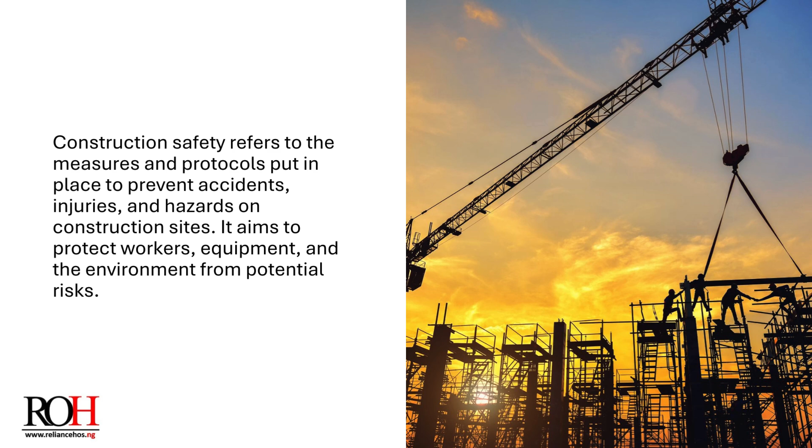Definition of construction safety: construction safety refers to the measures and protocols put in place to prevent accidents, injuries, and hazards on construction sites. It aims to protect workers, equipment, and the environment from potential risks.

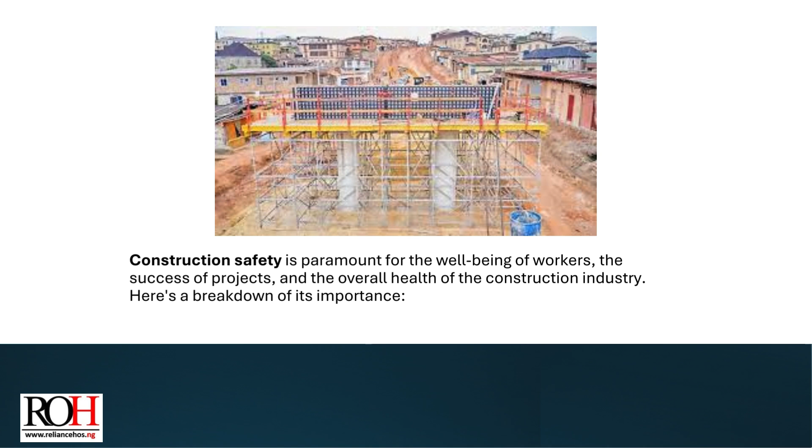Introduction to construction safety. Construction safety is paramount for the well-being of workers, the success of projects, and the overall health of the construction industry. Here's a breakdown of its importance.

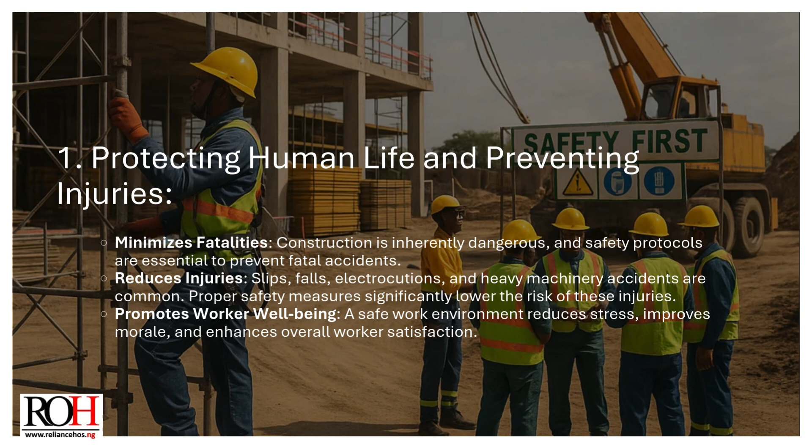1. Protecting human life and preventing injuries. Minimizes fatalities: construction is inherently dangerous, and safety protocols are essential to prevent fatal accidents. Reduces injuries: slips, falls, electrocutions, and heavy machinery accidents are common, and proper safety measures significantly lower the risk of these injuries. Promotes worker well-being: a safe work environment reduces stress, improves morale, and enhances overall worker satisfaction.

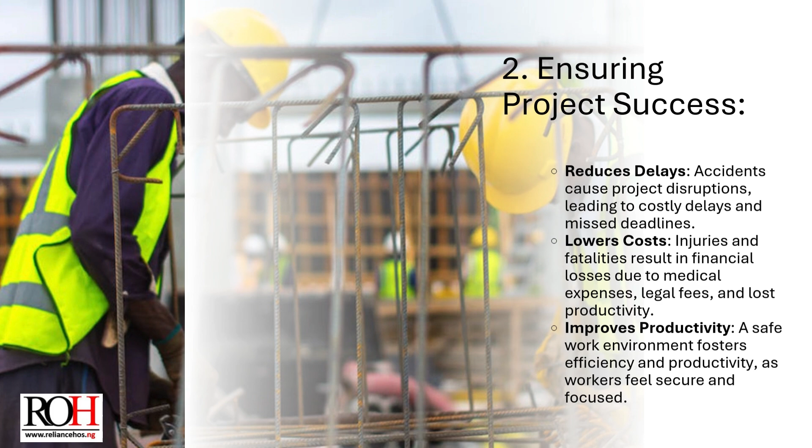2. Ensuring project success. Reduces delays: accidents cause project disruptions, leading to costly delays and missed deadlines. Lowers costs: injuries and fatalities result in financial losses due to medical expenses, legal fees, and lost productivity. Improves productivity: a safe work environment fosters efficiency and productivity as workers feel secure and focused.

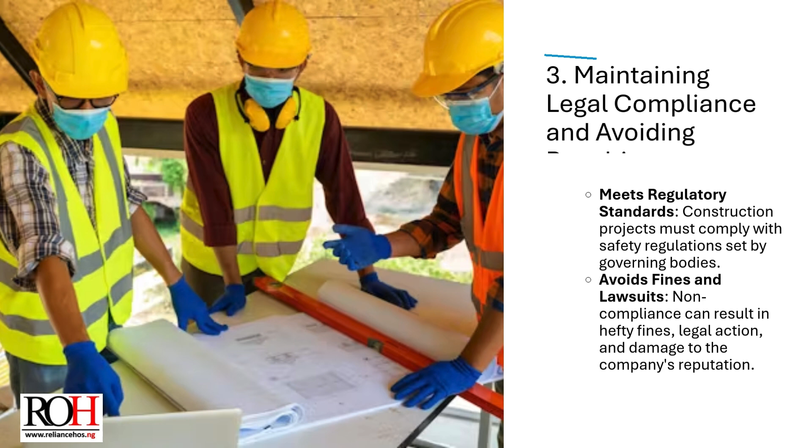3. Maintaining legal compliance and avoiding penalties. Meets regulatory standards: construction projects must comply with safety regulations set by governing bodies. Avoids fines and lawsuits: non-compliance can result in hefty fines, legal action, and damage to the company's reputation.

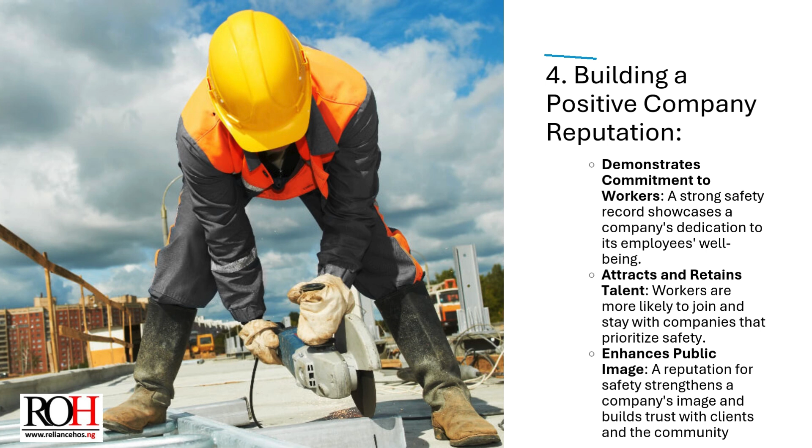4. Building a positive company reputation. Demonstrates commitment to workers: a strong safety record showcases a company's dedication to its employees' well-being. Attracts and retains talent: workers are more likely to join and stay with companies that prioritize safety. Enhances public image: a reputation for safety strengthens a company's image and builds trust with clients and the community.

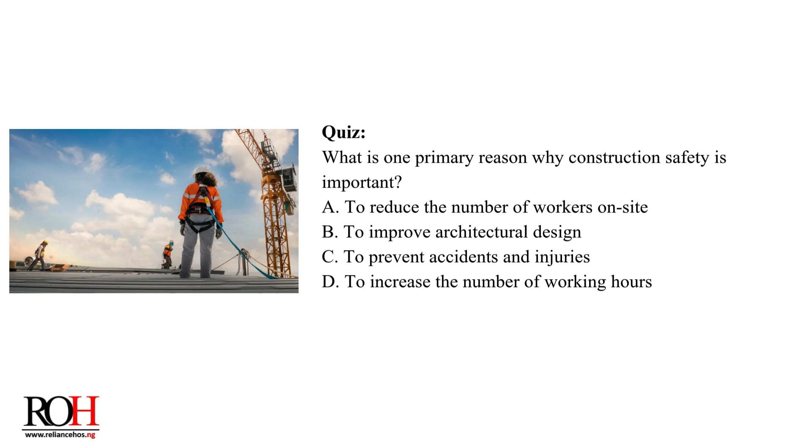Quiz: what is one primary reason why construction safety is important? A. To reduce the number of workers on site. B. To improve architectural design. C. To prevent accidents and injuries. D. To increase the number of working hours. Correct answer: to prevent accidents and injuries.

Common hazards and risk assessment. 1. Falls. Causes: unprotected edges, roofs, scaffolding, elevated platforms; slippery surfaces, wet floors, spills; improper ladder or scaffolding use; open holes or floor openings.

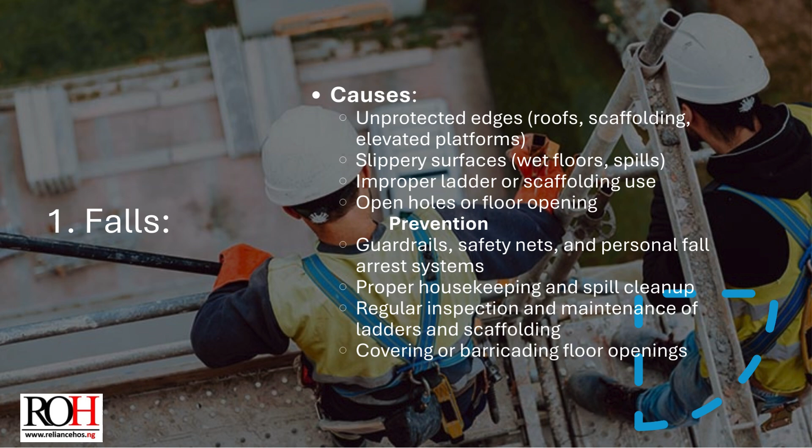Prevention: guardrails, safety nets, and personal fall arrest systems; proper housekeeping and spill cleanup; regular inspection and maintenance of ladders and scaffolding; covering or barricading floor openings.

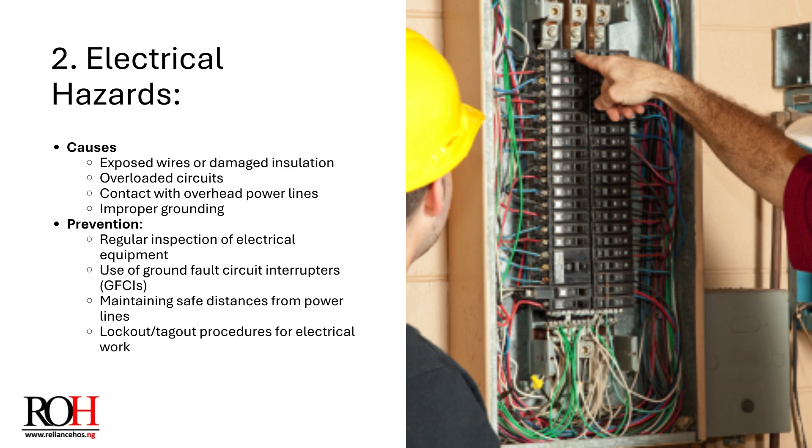2. Electrical hazards. Causes: exposed wires or damaged insulation, overloaded circuits, contact with overhead power lines, improper grounding. Prevention: regular inspection of electrical equipment, use of ground fault circuit interrupters (GFCIs), maintaining safe distances from power lines, and lockout/tagout procedures for electrical work.

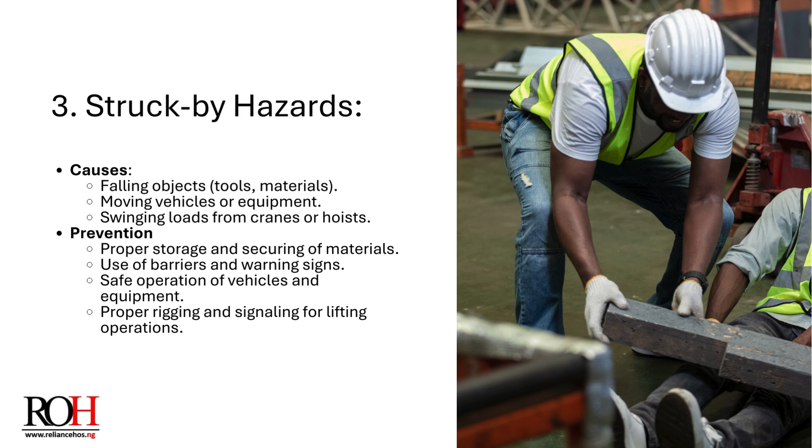3. Struck-by hazards. Causes: falling objects, tools, materials, moving vehicles or equipment, swinging loads from cranes or hoists. Prevention: proper storage and securing of materials, use of barriers and warning signs, safe operation of vehicles and equipment, and proper rigging and signaling for lifting operations.

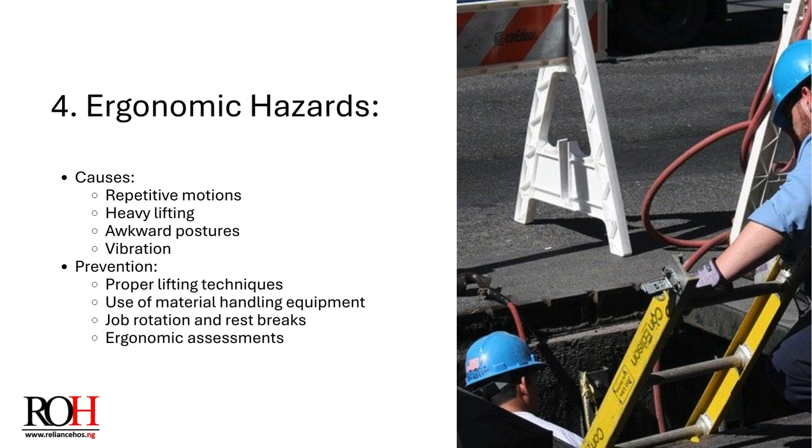4. Ergonomic hazards. Causes: repetitive motions, heavy lifting, awkward postures, vibration. Prevention: proper lifting techniques, use of material handling equipment, job rotation and rest breaks, and ergonomic assessments.

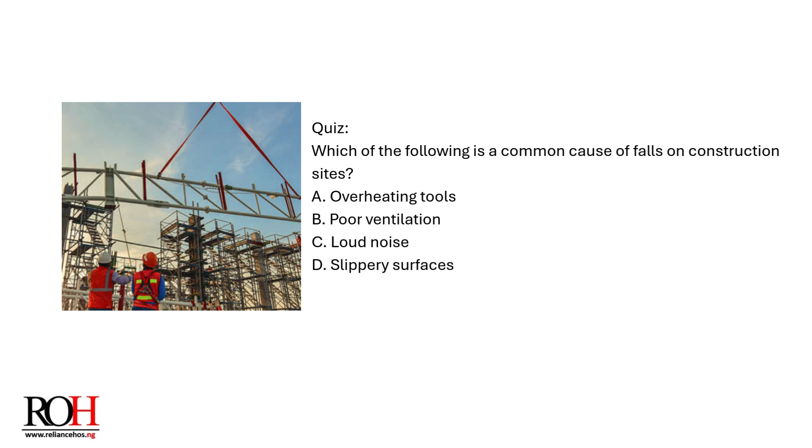Quiz: which of the following is a common cause of falls on construction sites? A. Overheating tools. B. Poor ventilation. C. Loud noise. D. Slippery surfaces. Correct answer: slippery surfaces.

Conducting risk assessments is a crucial part of ensuring safety in any environment, especially in industries like construction and food handling. Here's a breakdown of how to conduct effective risk assessments.

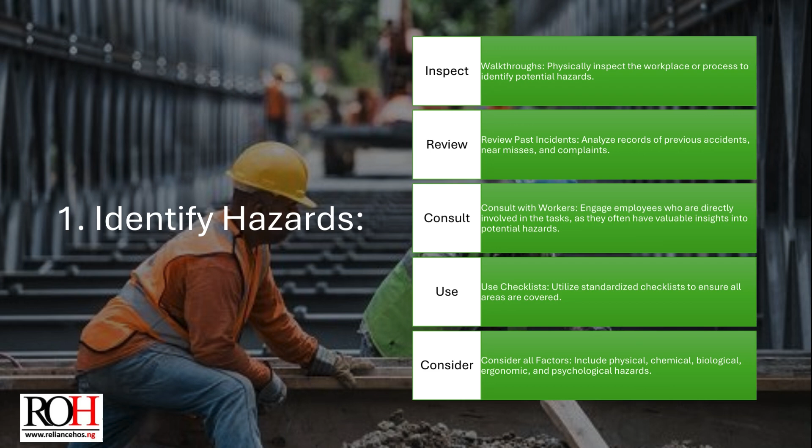1. Identify hazards. Inspect/walkthrough: physically inspect the workplace or process to identify potential hazards. Review past incidents: analyze records of previous accidents, near misses, and complaints. Consult with workers: engage employees who are directly involved in the tasks, as they often have valuable insights into potential hazards. Use checklists: utilize standardized checklists to ensure all areas are covered. Consider all factors: include physical, chemical, biological, ergonomic, and psychological hazards.

2. Assess the risks. Determine severity: evaluate the potential consequences of each hazard, ranging from minor injuries to fatalities. Evaluate likelihood: estimate the probability of each hazard occurring. Use a risk matrix: employ a risk matrix to prioritize hazards based on their severity and likelihood.

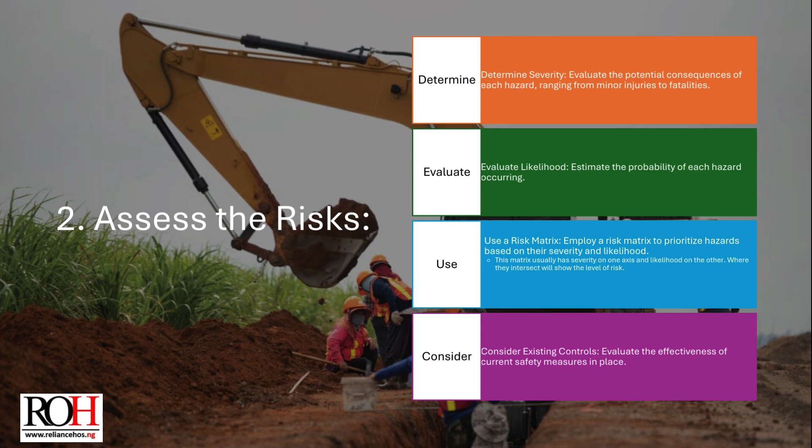This matrix usually has severity on one axis and likelihood on the other. Where they intersect will show the level of risk. Consider existing controls and evaluate the effectiveness of current safety measures in place.

3. Develop control measures. Elimination: if possible, remove the hazard entirely. Substitution: replace hazardous materials or processes with safer alternatives. Engineering controls: implement physical changes to the workplace or equipment to reduce hazards.

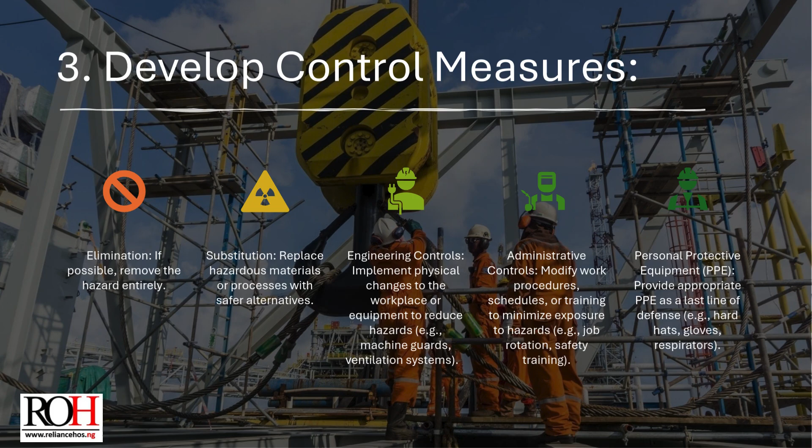Examples include machine guards and ventilation systems. Administrative controls modify work procedures, schedules, or training to minimize exposure to hazards, such as job rotation and safety training. Personal protective equipment, PPE, provides appropriate protection as a last line of defense, for example hard hats, gloves, and respirators.

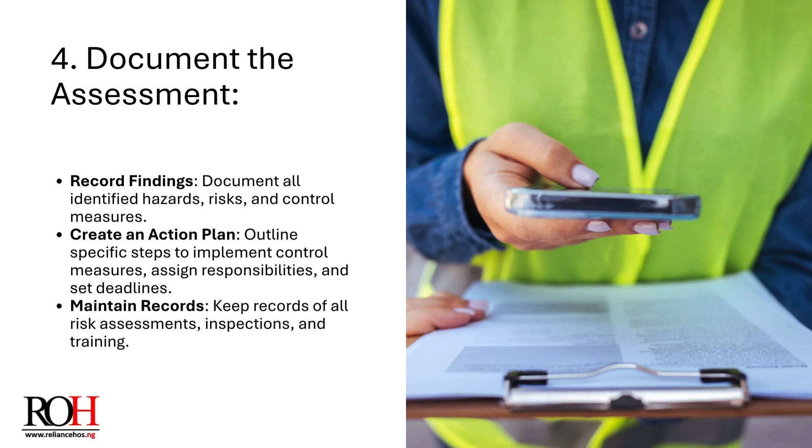4. Document the assessment. Record findings by documenting all identified hazards, risks, and control measures. Create an action plan outlining specific steps to implement control measures, assign responsibilities, and set deadlines. Maintain records of all risk assessments, inspections, and training.

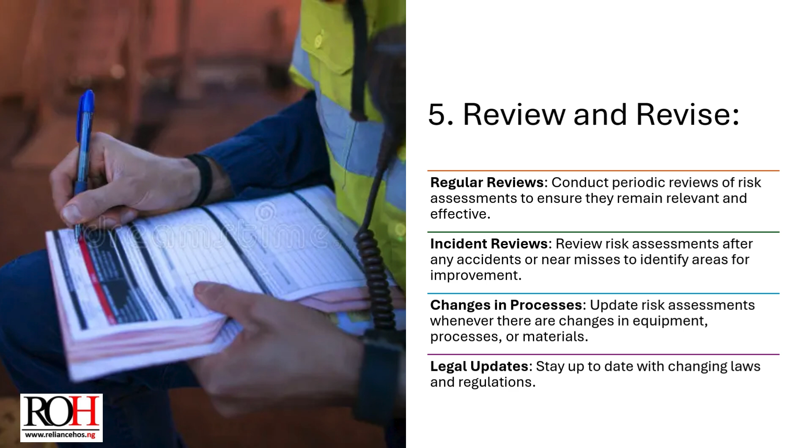5. Review and revise. Conduct periodic reviews of risk assessments to ensure they remain relevant and effective. Review risk assessments after any accidents or near misses to identify areas for improvement. Update risk assessments whenever there are changes in equipment, processes, or materials. Stay up to date with changing laws and regulations.

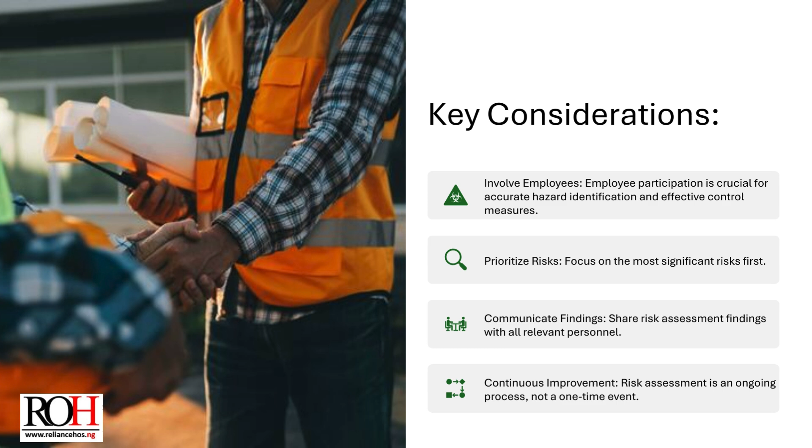Key considerations: involve employees, as employee participation is crucial for accurate hazard identification and effective control measures. Prioritize risks by focusing on the most significant ones first. Communicate findings by sharing risk assessment results with all relevant personnel. Remember, risk assessment is an ongoing process, not a one-time event.

Quiz: Do not evaluate the effectiveness of current safety measures in place. True or false? Correct answer: false.

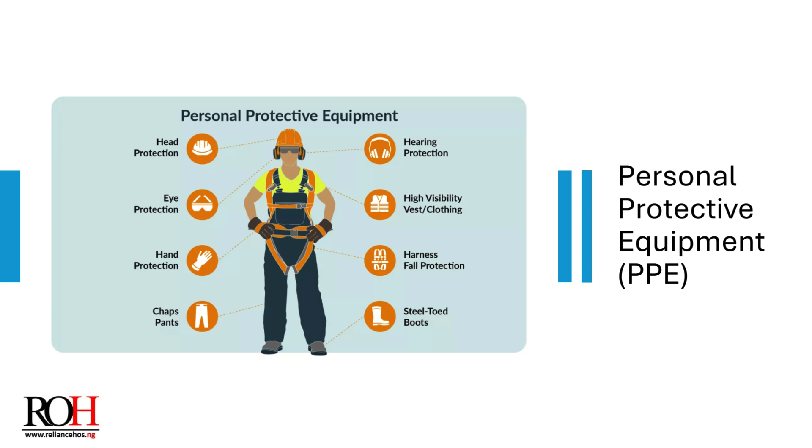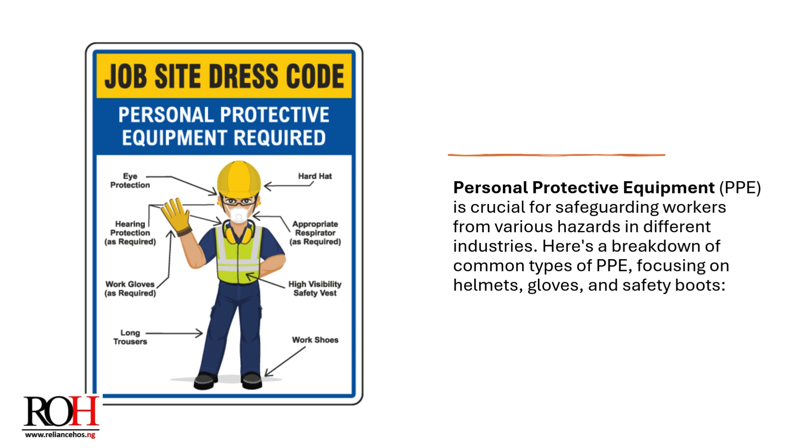Personal protective equipment, PPE, is crucial for safeguarding workers from various hazards in different industries. Here's a breakdown of common types of PPE, focusing on helmets, gloves, and safety boots.

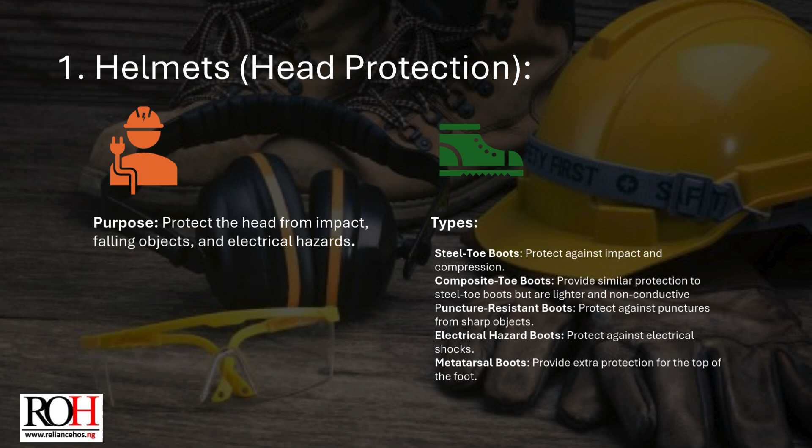1. Helmets for head protection: protect the head from impact, falling objects, and electrical hazards. Types include steel toe boots, which protect against impact and compression; composite toe boots, which provide similar protection but are lighter and non-conductive; puncture-resistant boots, which protect against sharp objects; electrical hazard boots, which protect against electrical shocks; and metatarsal boots, which provide extra protection for the top of the foot.

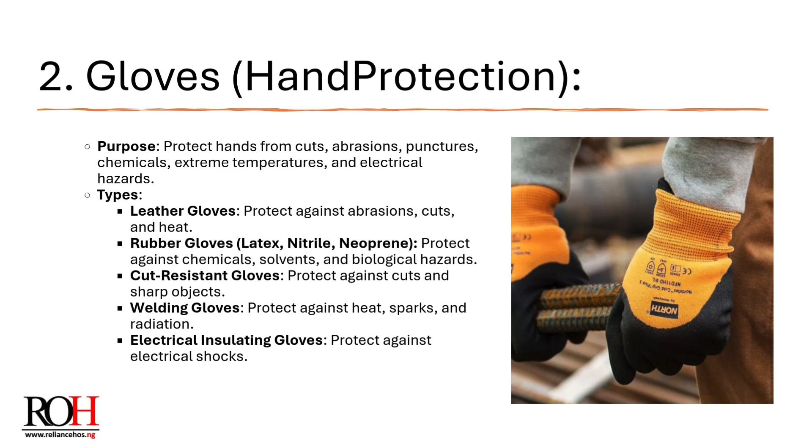2. Gloves for hand protection: protect hands from cuts, abrasions, punctures, chemicals, extreme temperatures, and electrical hazards. Types include leather gloves, which protect against abrasions, cuts, and heat; rubber gloves such as latex, nitrile, and neoprene, which protect against chemicals, solvents, and biological hazards; cut-resistant gloves, which protect against cuts and sharp objects; welding gloves, which protect against heat, sparks, and radiation; and electrical insulating gloves, which protect against electrical shocks.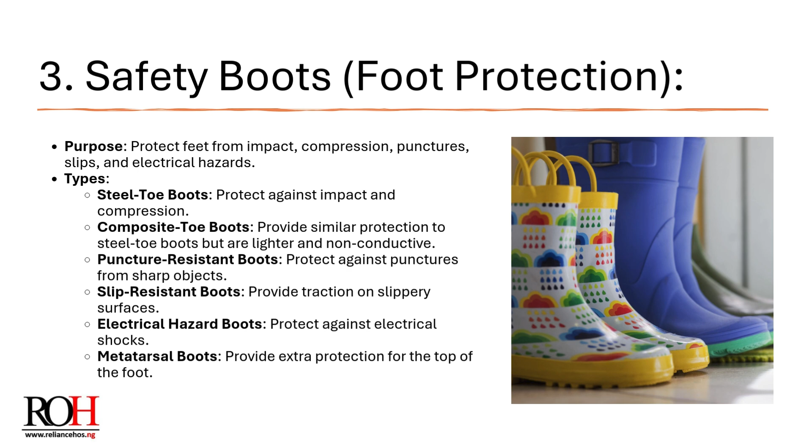3. Safety boots for foot protection: protect feet from impact, compression, punctures, slips, and electrical hazards. Types include steel toe boots for impact and compression; composite toe boots, lighter and non-conductive with similar protection; puncture-resistant boots against sharp objects; slip-resistant boots for traction on slippery surfaces; electrical hazard boots against shocks; and metatarsal boots for extra protection on top of the foot.

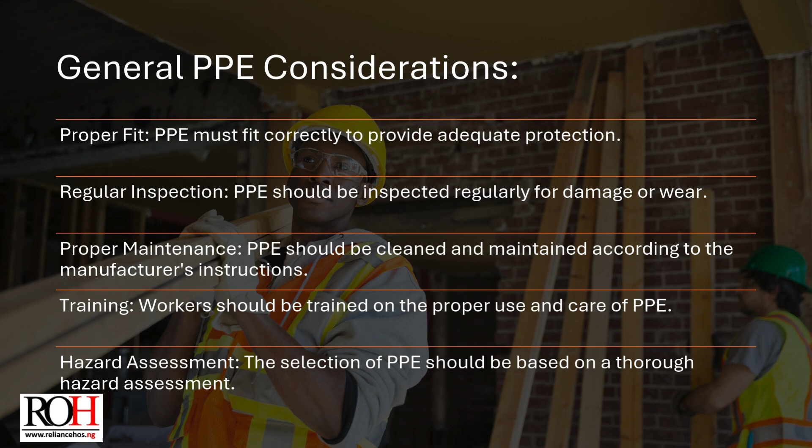General PPE considerations: proper fit, as PPE must fit correctly to provide adequate protection; regular inspection for damage or wear; proper maintenance by cleaning and maintaining PPE according to manufacturer's instructions; training workers on proper use and care; and hazard assessment, where PPE selection should be based on a thorough hazard assessment.

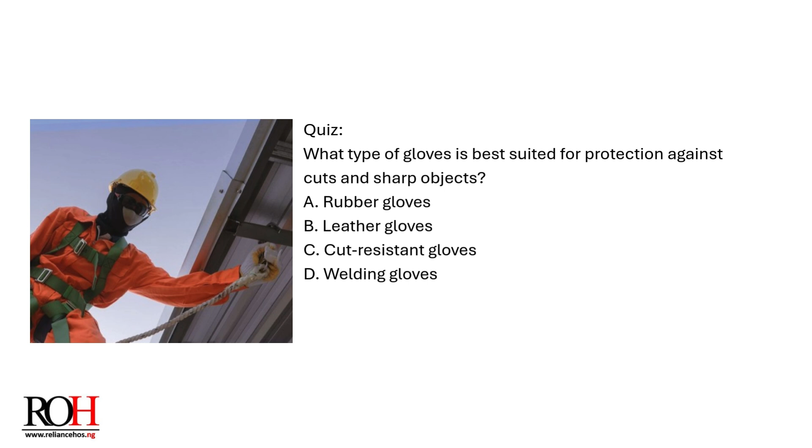Quiz: What type of gloves is best suited for protection against cuts and sharp objects? A. Rubber gloves. B. Leather gloves. C. Cut-resistant gloves. D. Welding gloves. Correct answer: cut-resistant gloves.

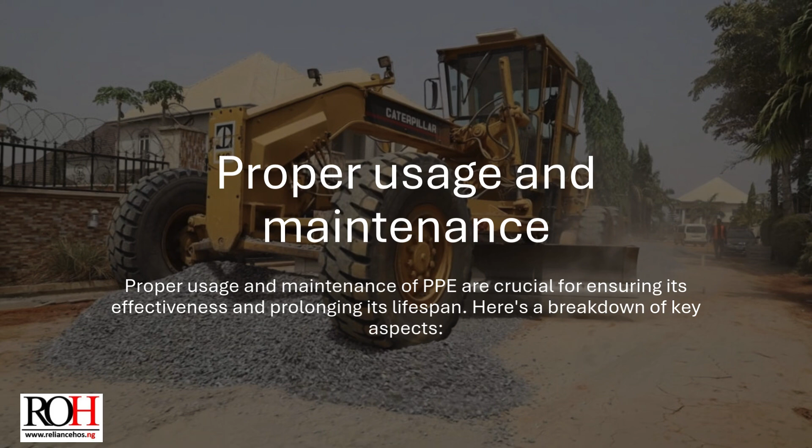Proper usage and maintenance. Proper usage and maintenance of PPE are crucial for ensuring its effectiveness and prolonging its lifespan. Here's a breakdown of key aspects.

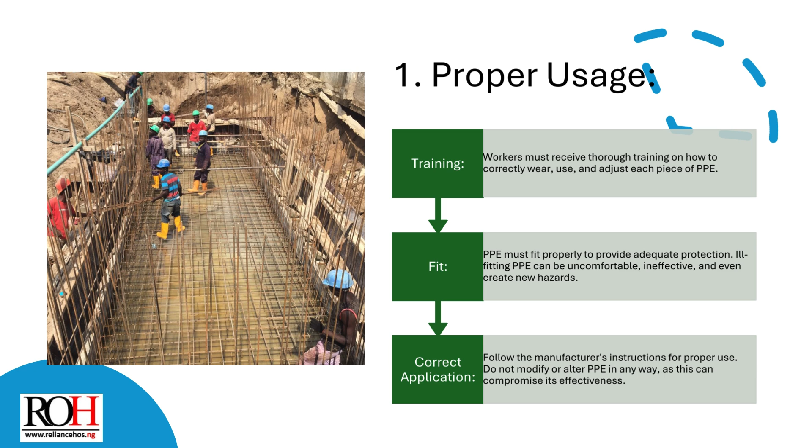1. Proper usage. Training: workers must receive thorough training on how to correctly wear, use, and adjust each piece of PPE. Fit: PPE must fit properly to provide adequate protection, as ill-fitting PPE can be uncomfortable, ineffective, and even create new hazards. Correct application: follow the manufacturer's instructions for proper use, and do not modify or alter PPE in any way, as this can compromise its effectiveness.

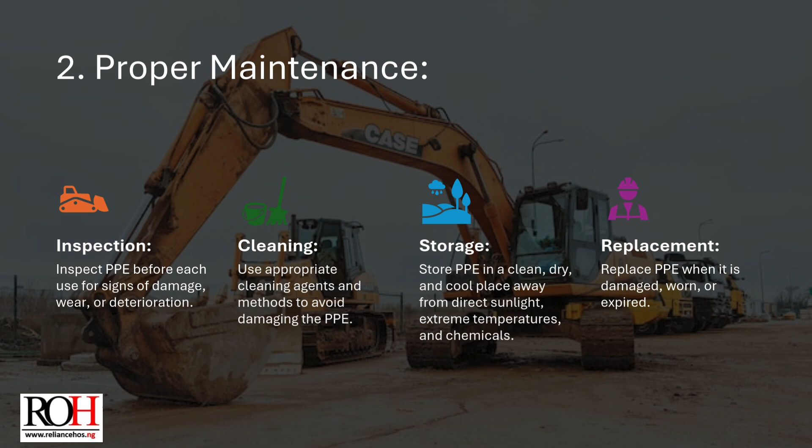Replacement: replace PPE when it is damaged, worn, or expired.

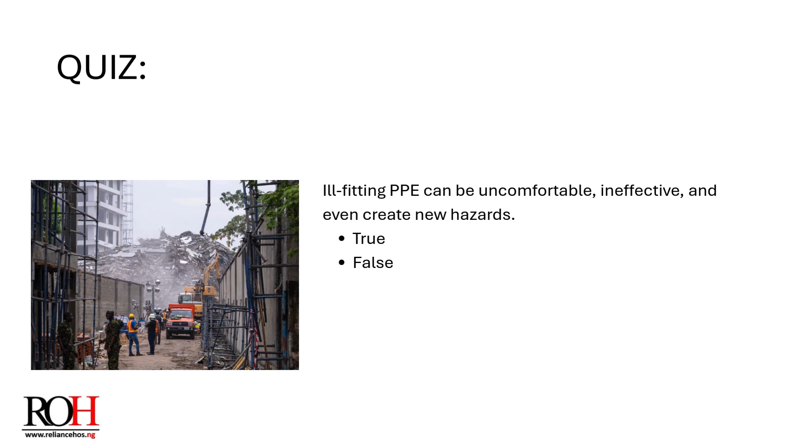Quiz: ill-fitting PPE can be uncomfortable, ineffective, and even create new hazards. True or false? Correct answer: true.

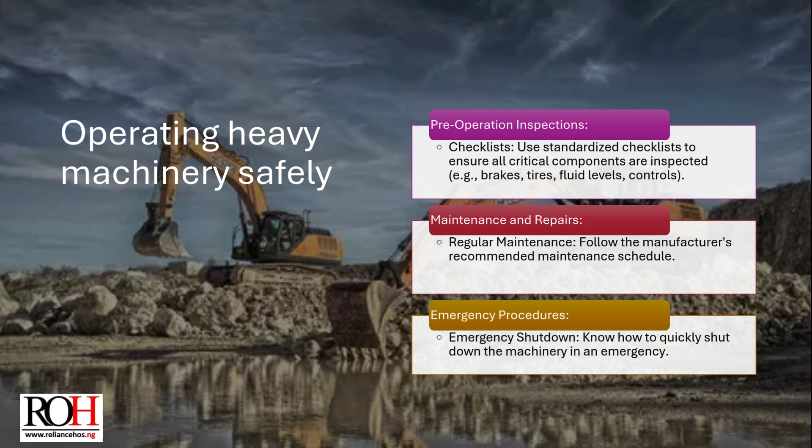Maintenance and repairs: follow the manufacturer's recommended maintenance schedule. For emergency procedures, know how to quickly shut down the machinery in an emergency.

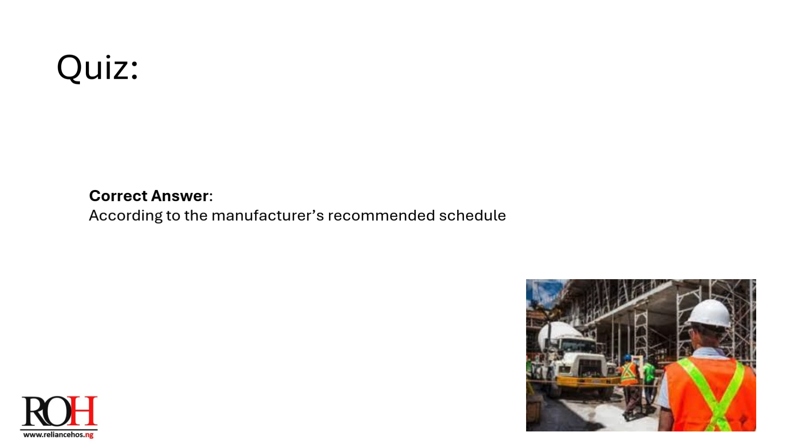Quiz: how should maintenance of heavy machinery be conducted? A. Based on the operator's preference. B. Only when there is a breakdown. C. At the end of the year. D. According to the manufacturer's recommended schedule. Correct answer: according to the manufacturer's recommended schedule.

Maintenance and inspection guidelines are vital components of a comprehensive construction safety program. They ensure that equipment and work areas remain safe, preventing accidents and injuries. Here's a breakdown of essential guidelines.

1. Equipment maintenance and inspection. Pre-use inspections: operators must conduct daily pre-use inspections of all equipment, for example cranes, forklifts, power tools. Scheduled maintenance: perform regular maintenance tasks, for example lubrication, filter changes, adjustments, by qualified personnel. Tool and equipment storage: store tools and equipment in designated areas to prevent damage and tripping hazards.

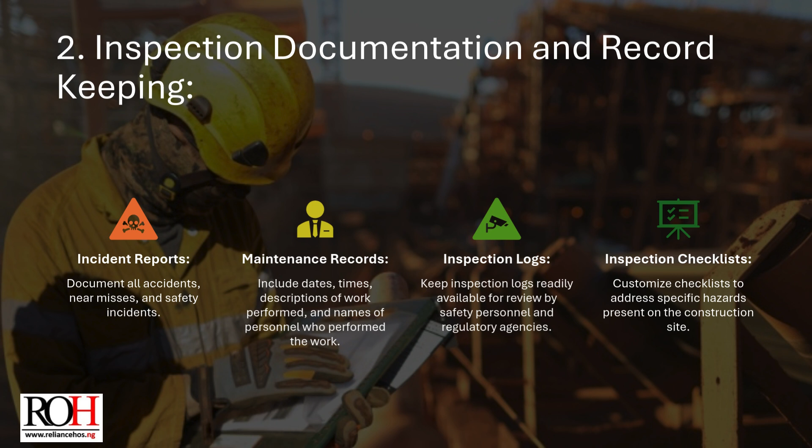2. Inspection, documentation, and record keeping. Incident reports: document all accidents, near misses, and safety incidents. Maintenance records include dates, times, descriptions of work performed, and names of personnel who performed the work. Inspection logs: keep them readily available for review by safety personnel and regulatory agencies. Inspection checklists: customize them to address specific hazards present on the construction site.

3. Site and work area inspections. Daily site inspections: pay close attention to areas with high traffic, heavy equipment, and hazardous materials. Regular inspections of specific areas: inspect scaffolding, ladders, and other elevated work platforms regularly. Housekeeping: remove debris, spills, and other hazards promptly.

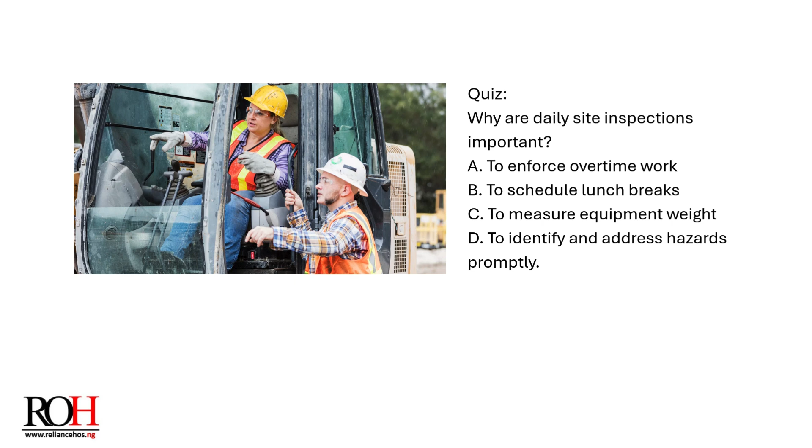Quiz: why are daily site inspections important? A. To enforce overtime work. B. To schedule lunch breaks. C. To measure equipment weight. D. To identify and address hazards promptly. Correct answer: to identify and address hazards promptly.

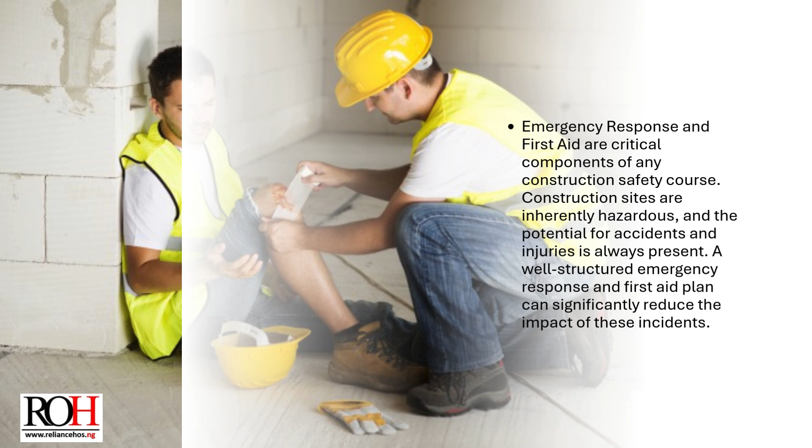Emergency response and first aid are critical components of any construction safety course. Construction sites are inherently hazardous, and the potential for accidents and injuries is always present. A well-structured emergency response and first aid plan can significantly reduce the impact of these incidents.

1. Emergency response planning: developing an emergency action plan (EAP). This plan should outline procedures for responding to various emergencies, including fires, explosions, chemical spills, falls, and medical emergencies. The EAP should include evacuation procedures and routes, designated assembly areas, contact information for emergency services, and roles and responsibilities of personnel during emergencies, plus procedures for reporting emergencies.

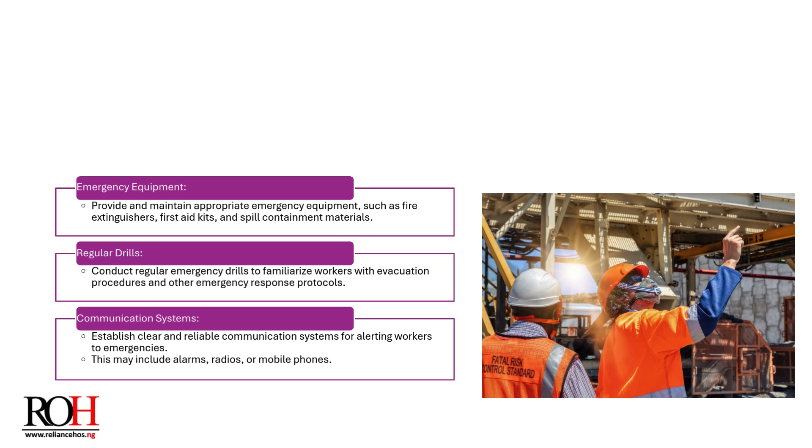Emergency equipment: provide and maintain appropriate emergency equipment, such as fire extinguishers, first aid kits, and spill containment materials. Regular drills: conduct regular emergency drills to familiarize workers with evacuation procedures and other emergency response protocols. Communication systems: establish clear and reliable systems for alerting workers to emergencies, which may include alarms, radios, or mobile phones.

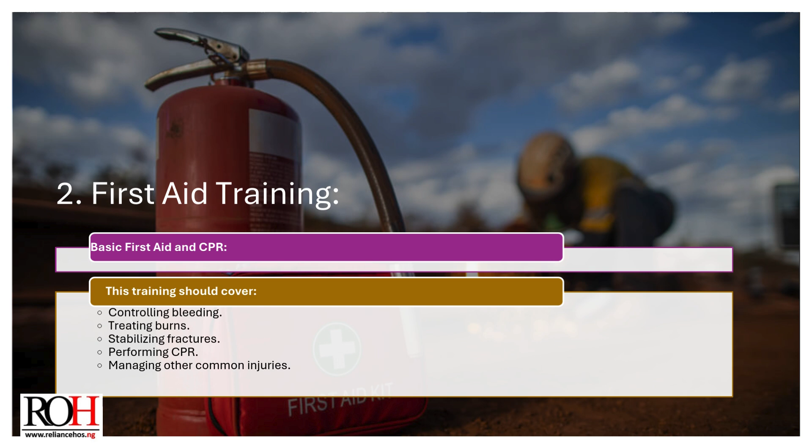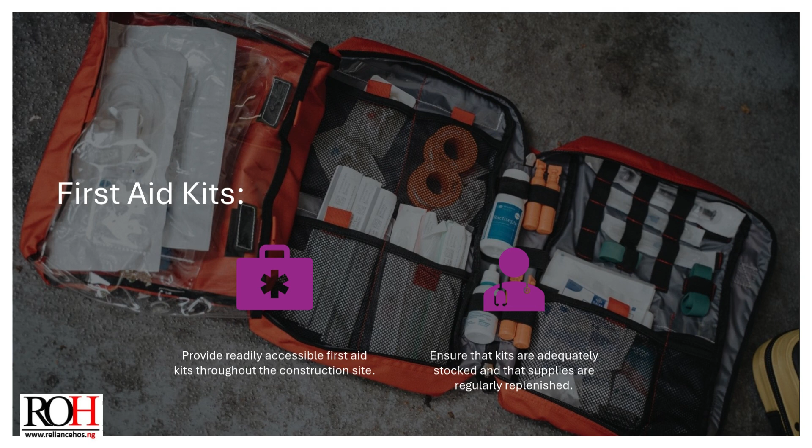2. First aid training. Basic first aid and CPR training should cover controlling bleeding, treating burns, stabilizing fractures, performing CPR, and managing other common injuries. First aid kits: provide readily accessible first aid kits throughout the construction site, and ensure kits are adequately stocked and supplies are regularly replenished.

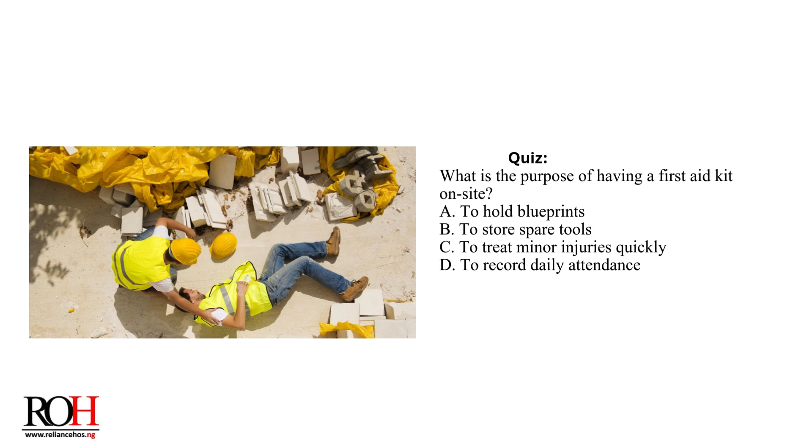Quiz: what is the purpose of having a first aid kit on site? A. To hold blueprints. B. To store spare tools. C. To treat minor injuries quickly. D. To record daily attendance. Correct answer: to treat minor injuries quickly.

Worksite communication and reporting. Clear communication protocols ensure that workers, supervisors, and safety personnel are on the same page regarding tasks, hazards, and emergency procedures. Regular safety briefings: conduct daily or weekly meetings to address potential risks and updates on safety protocols. Use communication tools such as radios, mobile apps, or signage to provide real-time updates and alerts on site.

Incident reporting system: implementing a structured system for reporting near misses, accidents, and unsafe conditions to prevent future incidents.

Next is assessment and certification. After completing the course, participants would take an assessment and get a certification.